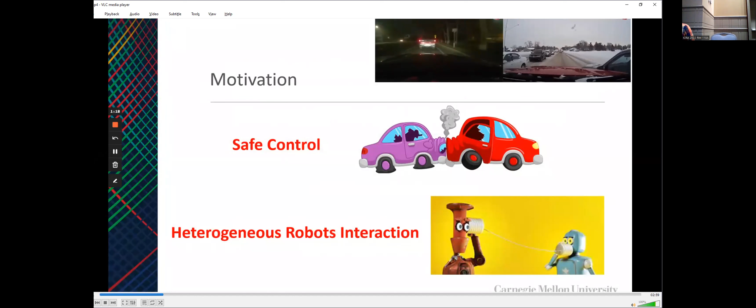These are the motivations of this work. As for technical objectives: first, we have safety as a priority for forming proof guarantees. Secondly, we want to remove the over-strict assumptions on surrounding robots to make them really think and act like a human. Thirdly, we want to enhance the safe controller's expressivity for more precise safe behavior characterization.

Here's our proposed framework for heterogeneous vehicles, especially in a highway merging scenario. It has two major components: behavior prediction and safe controller. The core idea of the safe controller is based on the forward invariance property of the control barrier function.

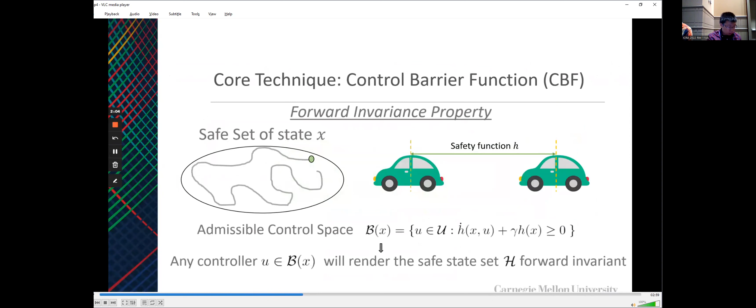CBF provides a way to constrain the robot motion so that the robot will always stay in this defined safe set. The core idea of our proposed parametric CBF is that we are introducing a new composition of the class K function as a linear combination of higher order polynomials to better characterize the system level safe behaviors while preserving safety guarantees.

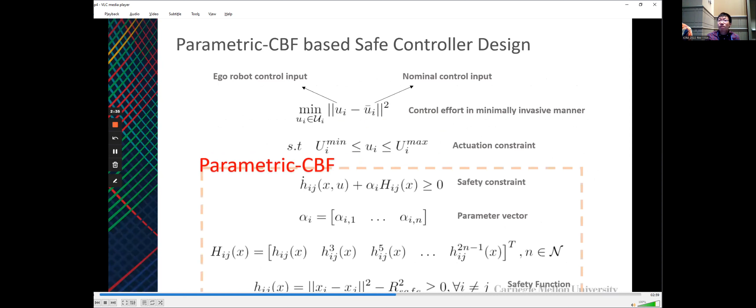The design of the safe controller starts from the minimal deviation control as the objective function. Besides the actuation constraint, here's where we have the parametric CBF to account for safety.

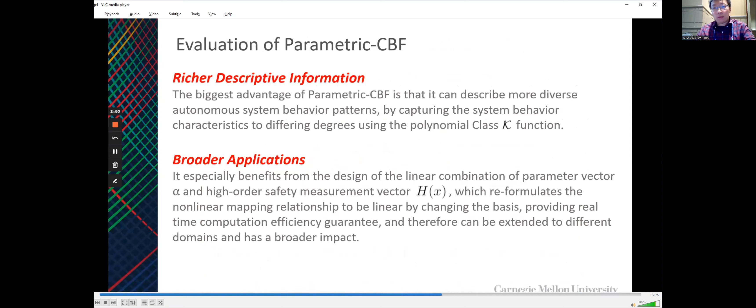Comparing to the traditional CBF, the proposed parametric CBF can actually provide richer behavior description thanks to the higher order polynomials. It also has the advantage of computational efficiency thanks to the nature of the linear combination design. These advantages make the proposed parametric CBF highly suitable to be applied in more complex systems.

And in the module of behavior prediction, ridge linear regression is used to enable the prediction of surrounding robots' safe controller parameter based on observations.

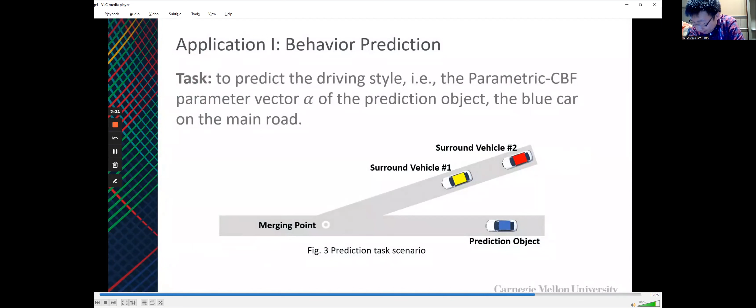Jesse, are you in the crowd? Cool. Yeah. All right. Tell me when you're ready.

Yeah, go. Hi, my name is Jesse Jiang, and today I'll be presenting my work on safe learning for uncertainty-aware legged locomotion via interval MDP abstraction. This work was done with Professors Ye Zhao and Sam Coogan.

So the motivation for our work is the legged robot motion planning problem. Specifically, we consider a scenario in which we have a high-level task for the robot specified using the syntactically co-safe fragment of linear temporal logic.

However, the robot has partially known dynamics, and additionally, there exist uncertainties in the environment such that the initial probability of satisfying the specification is too low. Then the goal of our work is to find safe paths in the state space which the robot can travel to sample and learn the uncertainties in the system, thereby improving the probability of satisfying the specification.

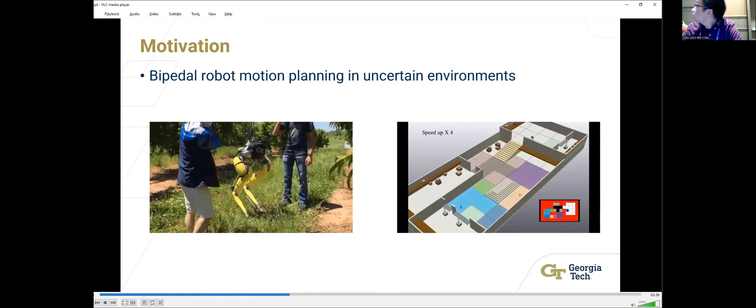So the methodology of our work is to assume a hyperrectangular partition of the state space. Using this partition, we can then construct an interval Markov decision process abstraction of the system dynamics, which formally incorporates the uncertainties present in the system and respects the inverted pendulum model dynamics of the legged robot.

We then combine this IMDP abstraction with a finite state automaton of our specification to create a product IMDP construction. Using this product IMDP construction along with graph theoretic methods, we can then calculate safe paths in the environment which don't violate the specification, allowing the robot to sample the uncertainties in the system.

We use Gaussian process regression with these samples to learn separately the terrain and model uncertainties present in our system, and then feed back our GP model into the product IMDP, shrinking the transition probability intervals and thereby iteratively improving the probability of satisfying the specification.

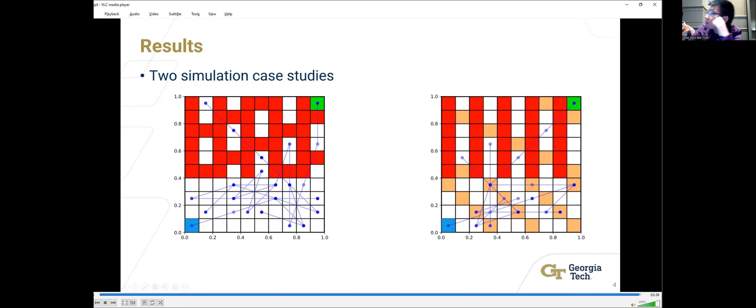I'm Matti, and today I'm going to talk about our recent work on Gaussian belief space planning under temporal logic specifications. In many real-world robotics scenarios, we don't have exact knowledge about the state of the system due to ubiquitous motion and sensing uncertainties.

Take, for example, this drone, which is localizing itself using noisy radio signals from an antenna station. As a consequence, we can only obtain a probability distribution over possible states, commonly known as the belief. In many robotic applications, people decouple estimation and planning by doing state-space planning based on the most likely state, which can lead to catastrophic failure, as shown here, where we can have a high probability of collision.

Instead, we focus on planning in belief space, which makes it possible to obtain paths that actively reason about the uncertainty of the system. As opposed to other belief space planning frameworks, we want to solve problems under various spatial temporal specifications. In our framework, it is possible to encode new desired system behavior, such as that we don't want to enter an area until our state uncertainty is sufficiently low.

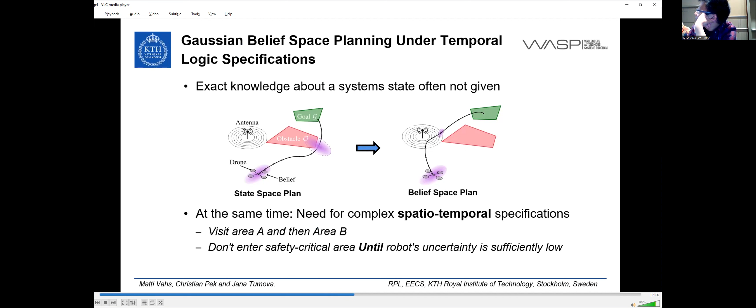We use Gaussian parameterizations of the underlying probability distributions and use the extended Kalman filter to model the belief dynamics. Then, given the belief, we define a specification in belief space using a fragment of risk signal temporal logic.

Within this module, we propose a novel formulation of the risk of being inside or outside of convex polygon regions, where we leverage risk measures such as the value at risk.

The cool thing about using risk signal temporal logic is that it comes with the so-called robustness values, so we can quantify how well we satisfy or violate a given specification. In the motion planning problem, we then maximize this robustness function subject to our belief dynamics to come up with a plan that satisfies our specification.

Here we show some preliminary results where we have a robot operating in a light dark domain. It can only accurately localize itself in the light areas, which could represent antenna stations.

We have a specification given as a risk-aware reach avoid objective. Interestingly, we can observe this active information gathering behavior since the robot is always moving close to the antenna stations.

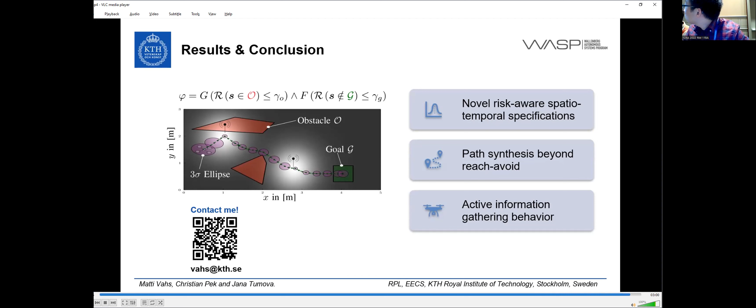In our work, we show that Gaussian belief space planning can be extended to solve complex, risk-aware spatial temporal tasks, and thus go beyond the classic reach avoid. Thanks for your attention, and I hope to answer your questions during the poster session.

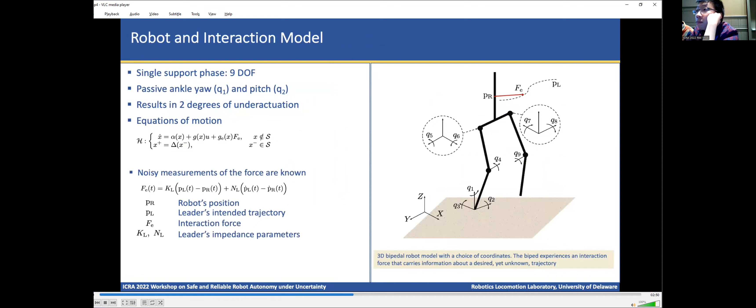Here we see on the right the 3D bipedal robot with its coordinates. We model the walking as a sequence of alternating phases of single and double support, and the external force is denoted.

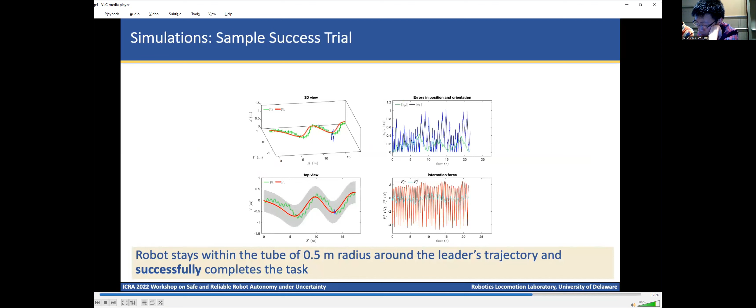In this slide, we explain the results of the robot trying to follow the leader's intention. We see that the robot is capable of staying within a tight tube of 0.5 meters around it and successfully completes the task.

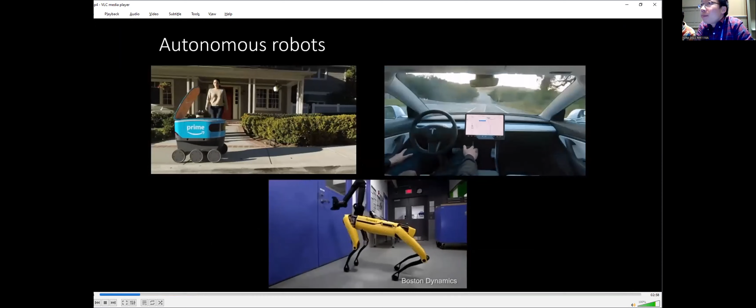Many emerging robotics applications involve autonomous robots in unknown environments. These robots include the functionality to detect hazards that are expected during the system design phase from sensing data. During deployment, unexpected events can become hazards if not detected in time. These hazards can be more costly than aborting a mission early.

We classify anomalies for robots along 4 axes. The first differentiates low-level sensory anomalies from high-level semantic ones. The second indicates if an anomaly is a hazard to the robot or not. The third discriminates visual anomalies that are geometric in nature from those that are not. The last one, not shown in the figure, indicates if an anomaly is relative to the robot or mission or not. We propose a novel dataset composed of 3 scenarios.

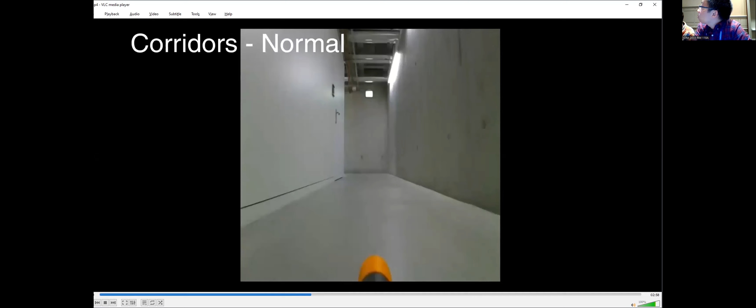The third, called corridors, is a set of recordings of a ground robot that traverses maintenance corridors of a university campus. Here we have recorded 8 different kinds of anomalies. In all scenarios, the expected normal situation is an empty environment, while any object, person, or situation that differs from that is considered anomalous.

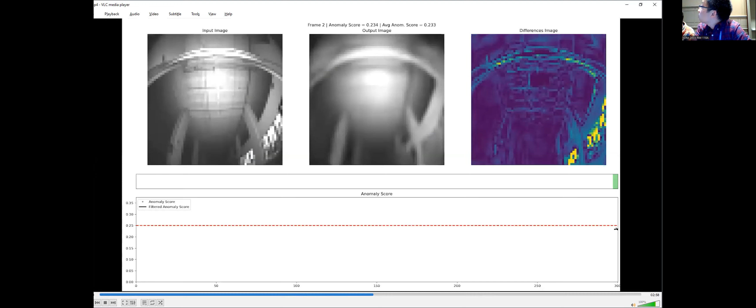We then train, using this data, a model based on an autoencoder and Real NVP, and deployed it on a real drone. We show 3 videos. In all of them, on the top left you see an image coming from the drone, in the center the autoencoder's reproduction, and on the right side an error map between the input and output of the autoencoder that highlights an anomaly.

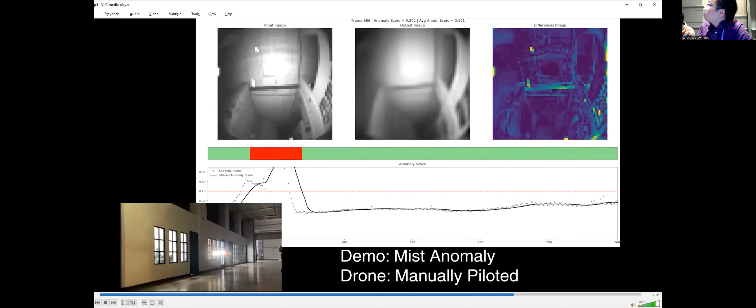In the first video, we see no anomalies, so the system doesn't trigger the anomaly detection. In the second, the drone is manually piloted and encounters a mist anomaly. Since it's manually piloted, the anomaly is detected, but then the pilot makes the drone traverse the anomaly. The plot on the bottom is the anomaly score we use to trigger the anomaly detection. In the last one, the drone is autonomous, the system is on board, and we successfully detect the tape anomaly.

In this case, we do not limit ourselves to detection; we also trigger a safety policy where the drone retracts and actually makes a second run that follows a safe path.

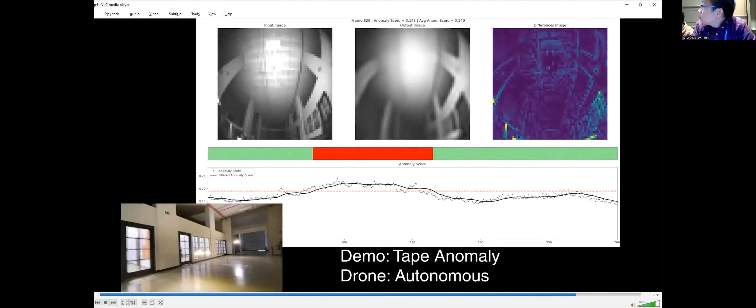We considered the task of detecting anomalies for autonomous mobile robots, categorized the relevant types of visual anomalies, proposed a novel dataset built for this task, and tested a state-of-the-art approach in real time. These are only the first steps of a larger project. Thank you for listening. Feel free to ask me any question here or at the poster session.

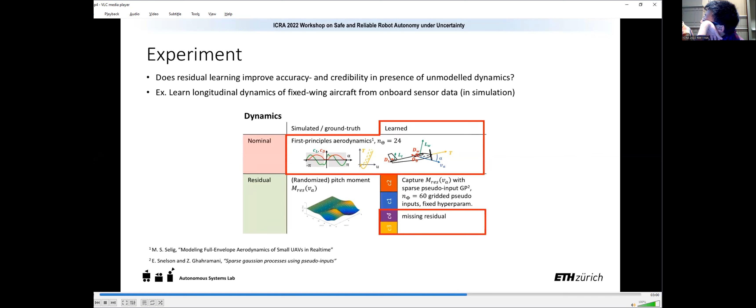We compare it to the case where we ignore the additional pitch moment and only try and learn the nominal dynamics. In terms of the result, we see that learning rate, first, is highly dependent on the information content of the trajectory, which would be expected.

So for the gliding flight, which is basically steady state, there's not much to learn and the error stays somehow high, whereas for the highly informative drop trajectory, the error is quickly reduced over full state space. Now, whether or not we learn the residual actually doesn't make a big difference for that case.

However, on the right side, if you have a look at the similarity between estimated and actual error distributions, you see that learning the residual in this case helps to improve the accuracy of the uncertainty specification.

Also, from a safety perspective, we would like to have a low credibility index, which means the predicted distribution should be a little bit wider than the true error distribution. This is the case for one, and overall we see that including residual learning gives us a lower credibility index, which is beneficial for safety.

So thanks for your attention, and happy to speak more in the poster session.

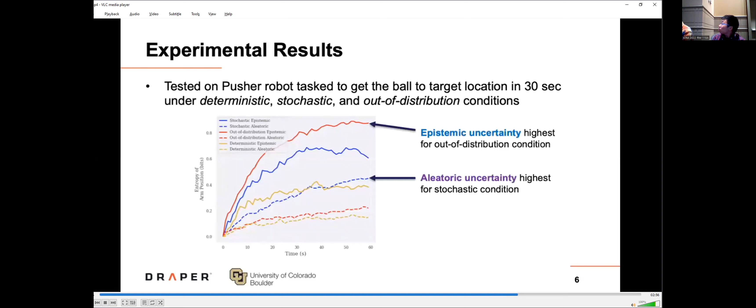Here we see that epistemic is highest for the out-of-distribution condition and aleatoric is highest for the stochastic condition, which is expected.

We can also look at total uncertainty for all time and for all states in the three conditions, and here we also present the competency values as forecasted probability of success.

This allows us to see how the different uncertainty types correspond to the competency values, and we can say in this task the agent is least confident in the stochastic condition.

So in conclusion, this shows how proper uncertainty quantification methods can lead to more informative competency reporting. For future work, we want to analyze how the different uncertainty types correspond with each other and interact with each other, and how that also impacts the agent competency. Thank you.

Not sure if anyone's coming in person for this one. So let's assume that they're not.

Hello everyone, we are glad to present our work, Effect Learning for Machine Perception with System-Level Objectives. First, let me introduce some background of our work.

A typical autonomous system consists of two components: perception and controller. Usually the perception component contains the machine learning model that senses the true environment and outputs the perceived environment to the controller. The controller then makes corresponding decisions based on this information.

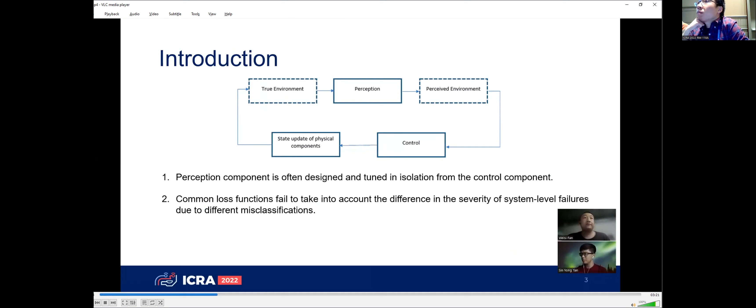However, the perception component is often designed in isolation from the control component. Also, the common loss functions fail to take into account the difference in severity of system-level failures due to different misclassifications. More specifically, for safety consideration, it is necessary to incorporate safety rules into the autonomous system.

For some specific classes, for example, pedestrians need to have higher priority than other classes. Also, current perception components still have difficulty formally specifying properties that reflect human-level perception. Last but not least, the widely used loss functions do not have the ability to represent safety rules.

To resolve these limitations, I will let my partner Sin Yong introduce our proposed framework. Thank you, Wesley. Hello everyone, I'm Sin Yong. I'll continue with the next part of the presentation, the proposed framework of our group.

To give the framework a little more context, we are experimenting with this framework in an autonomous driving setting. In the perception model, we are mainly doing object detection. For the controller, we look at vehicle information such as position and velocity, and perform actions that control the car's acceleration, steering, etc.

Now that we know the entire setup, I will dive a little deeper into the loss and rulebook components. In the loss function, we mainly have two parts. First, we have the classical perception loss, which is commonly the combination of a bounding box loss and a classification loss. Secondly, we have the rulebook loss as well.

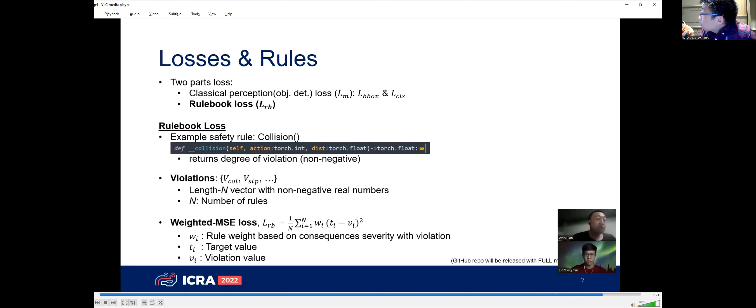Now we have a bunch of these rules in the rulebook, so what we get in the end is a vector of non-negative rule violation numbers. Using this violation vector, the rulebook loss can be computed as a weighted mean square error loss as expressed in the slide. The weight in this equation is a rule weight that we assign based on the severity of the consequences if the rule is violated.

With that, I would like to thank you for your attention, and feel free to reach out to us if you have any questions. Thank you.

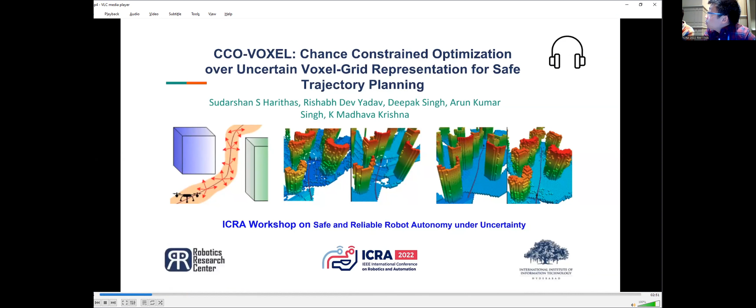In an uncertain voxel grid representation, it is difficult to extract accurate distance-to-closest-obstacle measurements, and furthermore, the gradients obtained are not stable. This might lead the trajectory optimizer to generate trajectories that go very close to an obstacle or even collide with it. Therefore, there is a requirement to develop motion planning frameworks that are agnostic to the underlying uncertainty in the voxel grid representation.

As a solution to the defined problem, we propose CCO Voxel, a method that accounts for the uncertainty in the distance-to-collision measurements and determines an optimal solution through a gradient-free cross-entropy minimization technique.

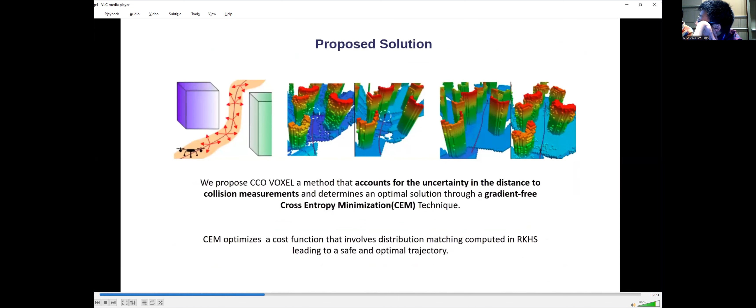An overview of our pipeline is as follows.

The planning algorithm is initialized by the availability of a goal point. Pose and point cloud data is used to generate an octomap, and EDT is used to compute the collision distance for all the points in the map.

Our initial trajectory search builds on kinodynamic A-star, with the crucial difference that we use MMD as part of the edge cost that connects the two nodes of the graph. Output of the kinodynamic A-star can be a suboptimal trajectory. We use cross-entropy minimization, a gradient-free optimization method, to further refine the trajectory, improve its smoothness, and maintain clearance from an obstacle.

The MMD computation involves two steps. First, for a given query point, the collision distance is determined using EDT, and a non-parametric collision distance noise model is used to obtain multiple samples of the distance measurements and the corresponding constraint violations.

An autoencoder is used to improve sample complexity and reduce computational load. For a given high-dimensional sample data, the autoencoder projects it into a low-dimensional embedding space, and the autoencoder is trained using supervised learning. In this paper, we further prove that the desired distribution can be modeled as a Dirac function to compute the MMD. The output of the cross-entropy minimization is an optimal trajectory.

Simulations have been conducted for both qualitative and quantitative evaluation of our algorithm. We create two customized Gazebo environments, namely the box-cylinder world and the wall-grid world.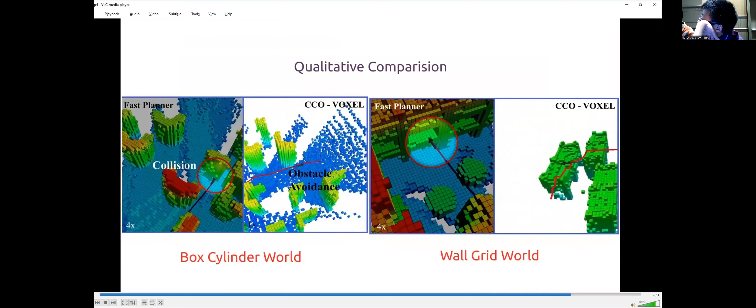We conduct a fully autonomous test flight in an outdoor unknown environment. We use a customized self-developed quadrotor with a D415 camera, a Pixhawk flight controller with PX4 firmware. All the computations, including mapping, state estimation, and planning, are conducted on an onboard Intel NUC.

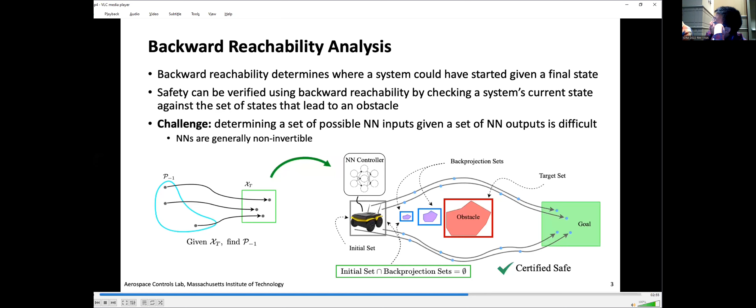Our work circumvents the problem of propagating sets backward through a neural network by first finding the set of possible states that the system could have come from given limits on the control values. We call this set of states the back reachable set.

Next, we relax the neural network over the back reachable set to get affine upper and lower bounds on the control values. These affine bounds give us a better picture of what the neural network is doing when compared with the saturation limits of the system.

Finally, we use these affine bounds to determine the set of states that reach the target set while also satisfying these bounds, which gives us an idea of what the system could have actually come from, i.e. the back projection sets. We use this technique to show that we can certify safety for systems where forward reachability fails, like the situation you can see here.

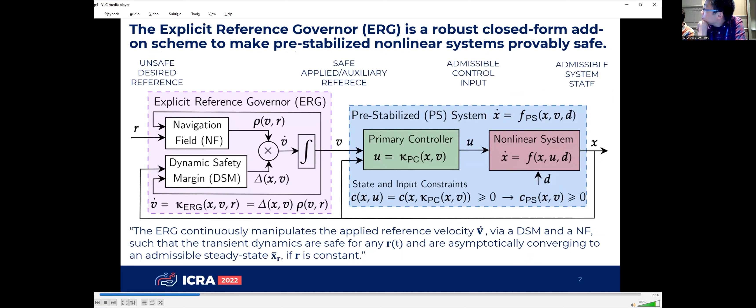The ERG is a robust closed form add-on scheme to make pre-stabilized nonlinear systems provably safe. It does this by manipulating the reference velocity, V dot, via a dynamic safety margin and a navigation field, so that the transient dynamics are safe for any reference R of t. And when this reference is kept constant, there will be convergence to some steady state admissible state.

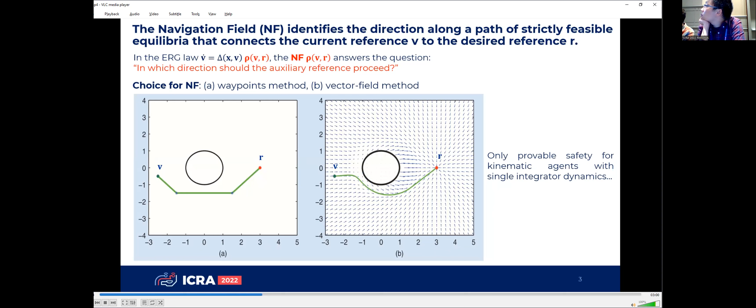The first building block is the navigation field, which identifies the direction. It's a vector along a path of strictly feasible equilibria, bringing the current reference V to the desired reference R. One can use waypoint or vector field methods, but know that these only provide safety guarantees for slowly moving kinematic agents, so single integrator dynamics.

That's why we have a second building block, the dynamic safety margin, which predicts a minimal distance metric from a trajectory or a set to constraint violation. The larger this dynamic safety margin, the safer it is to change the auxiliary reference. There exist different types of dynamic safety margins: some are more performant, like the trajectory-based one; some are more easy to robustify, like the Lyapunov-based one or the set-based ones; and some are used for black box systems, like reachability-based.

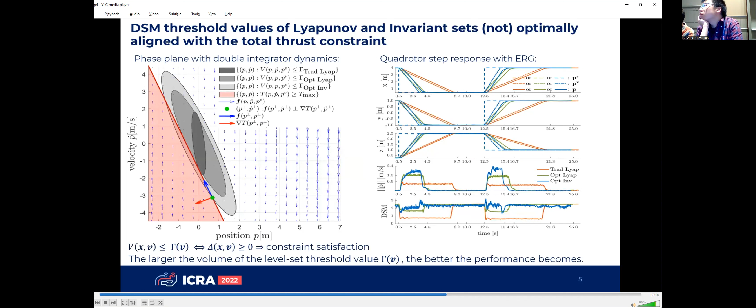Here is an example of a double integrator system, and we see the phase plane plot with three invariant sets that touch the constraint, in this case a total thrust constraint. By solving some small nonlinear problems offline, we can align these level sets with the constraint to increase performance, or even compute a more generic, larger invariant set by finding that green point where the system dynamics stop pointing inward. So the larger the set, the better the performance, as can be seen in the step response, where it is almost twice as fast if we align it.

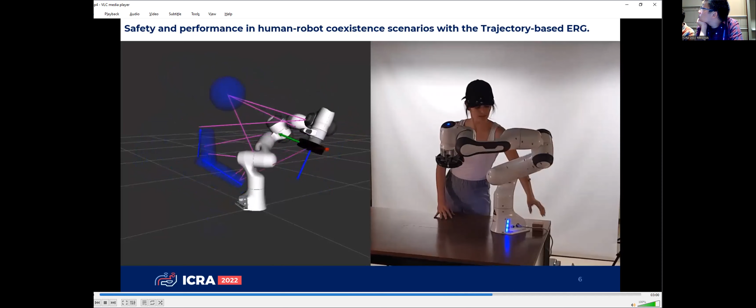Here is an example in a human-robot coexistence scenario where the human operator is trying to coexist safely with the robot, but while keeping the performance high, which is definitely not the case in most of the prior works. We show that the human can reposition an object safely, while the robot is accounting for both torque and end-effector speed and velocity constraints, and also joint angle limits. This allows safe and performant operation in robot tasks.

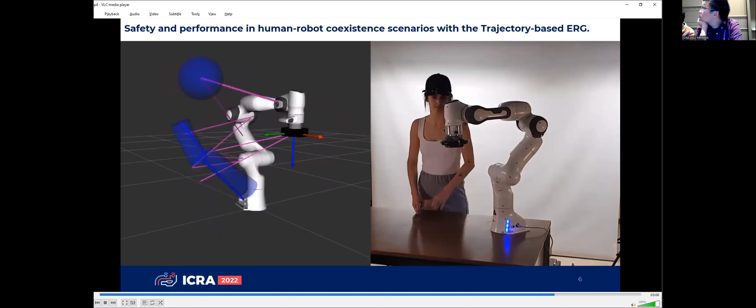Hello everyone, my name is Anil. Today I'm going to talk about our work on input to state safety with disturbance observer based control barrier functions.

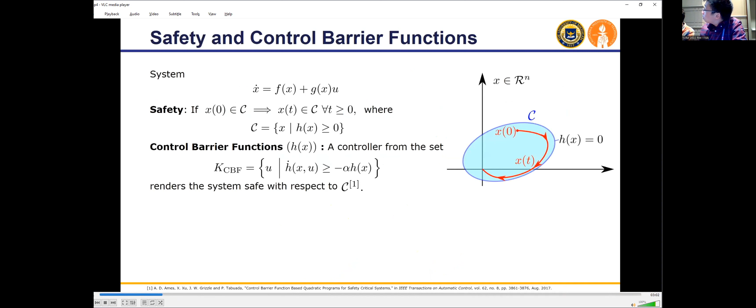In this work, we consider safety in the context of forward invariance, where we want our system trajectories to remain in a predefined set. We know that control barrier functions give us a set of controllers that actually ensure this task.

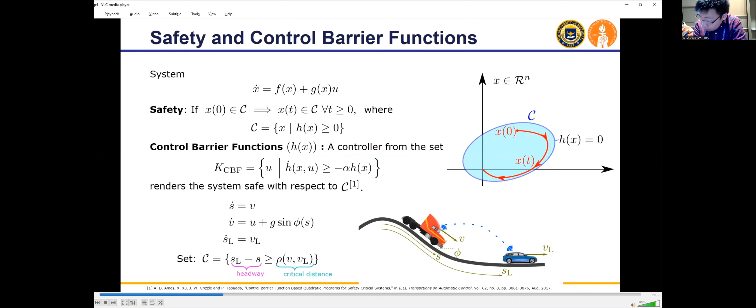We implemented this method for an autonomous vehicle problem, using a simple double integrator model to control a truck, where we want to stay a critical distance away from the leader. We implemented this approach for the truck in a flat road case, and we were able to ensure the safety.

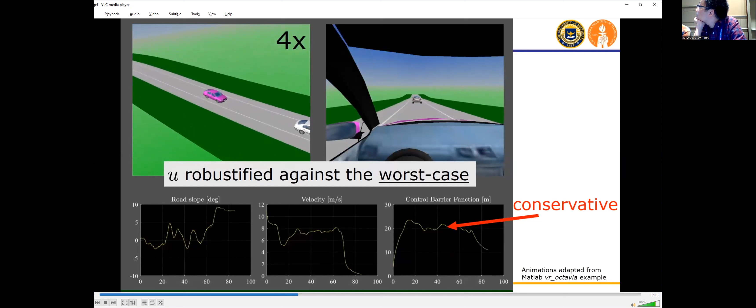However, the problem is if we have external disturbances such as road slope, we realize that's no longer the case, unfortunately. If we take the worst case of the road disturbance, then it's going to be a very, very conservative result.

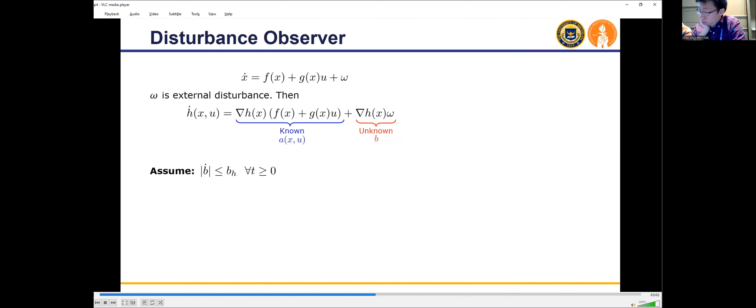So in that case, we just want to observe the effect of the uncertainty on the CBF online, and cancel that. This is our method. We have an assumption that this observer's uncertainty is upper bounded, and the time derivative of this uncertainty is also upper bounded.

We are making use of the term B being scalar, and we are coming up with this high gain disturbance observer. We observe that term B, and we cancel it out.

We have two types of errors coming from the observer dynamics, and we use input-to-state safety to handle the permanent error that remains as time goes to infinity.

In input-to-state safety, we come up with a larger set to be the safe set, bounding the safety degradation in the system in the context of external disturbance. This is good because we can make sure this larger set can be arbitrarily made closer to the original set by choosing appropriate parameters.

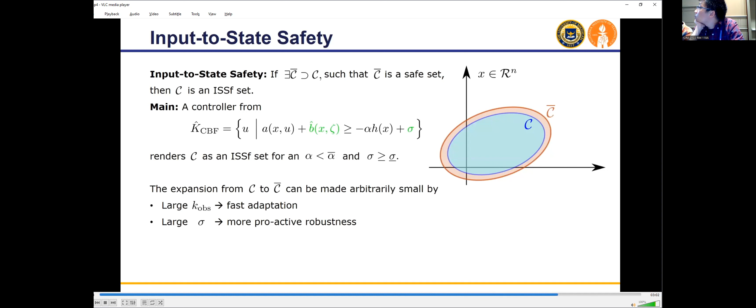When we implemented this method in simulation, we saw that we can get safety without following the leader conservatively.

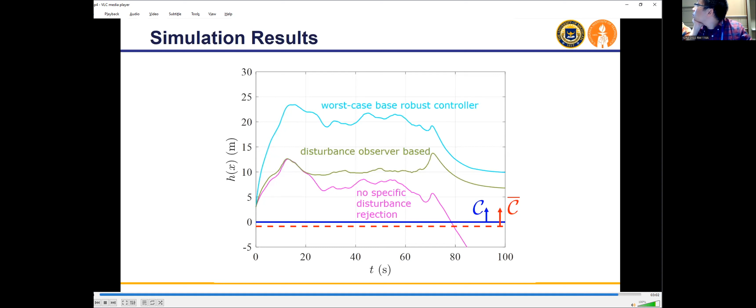The simulation results show that our ensured safety with the C bar is actually very close to the original safety task.

Thank you for listening. I'll be happy to answer your questions at the poster.

Ready? Cool. Hi everyone, my name is Wang Yu from Lehigh University. This is a work of collaboration with Dr. Somarakis and Professor Motee. Today I'm going to present our work on the risk of cascading collisions in a platoon of autonomous cars.

Let us imagine on the highway there is a platoon of cars, and our goal is to form a platoon. Imagine yourself driving on the highway, and you can see the car in front and the car behind. This is actually the communication path graph.

As a result, by solving these dynamic systems, we find that the intervehicle distance is actually a random variable, and we consider failure as a collision, whenever it's less than zero. Given the fact that it's a random variable, the chance of this kind of event eventually happening is going to be 1, which is almost surely.

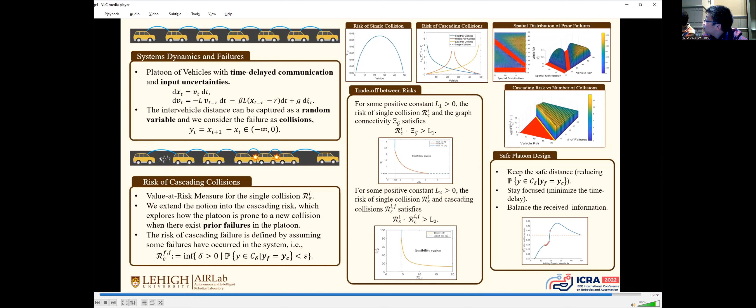In the end, try to balance the information you receive from the nearest cars and the car that's far away. Thank you so much for your attention, and I'm happy to see you at the further sessions. Thank you.

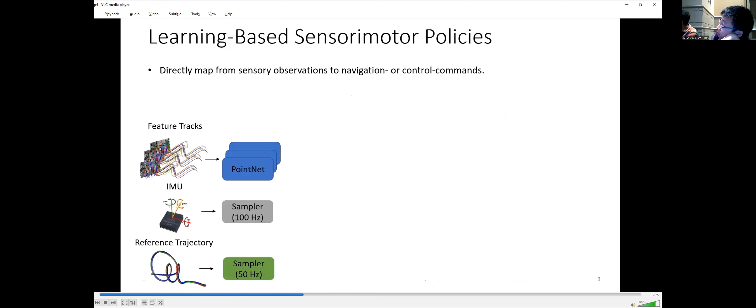In my research, I investigate learning-based sensorimotor policies. In contrast to traditional approaches to vision-based autonomous flight, learning-based sensorimotor policies directly map from onboard observations such as visual observations, feature tracks, IMU measurements, or a reference trajectory to control commands. Such direct mapping and therefore tight coupling allows us to achieve low latency from perception to action.

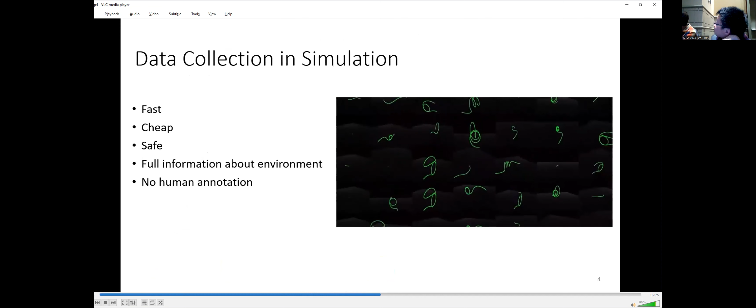As such, data-driven approaches require a lot of data to be trained, and they are typically trained in simulation. Simulation is a perfect training ground for such a task because it's fast, cheap, and safe, and it provides full information about the environment and doesn't require any human annotation. However, training such a learning-based policy in simulation requires bridging the simulation to reality.

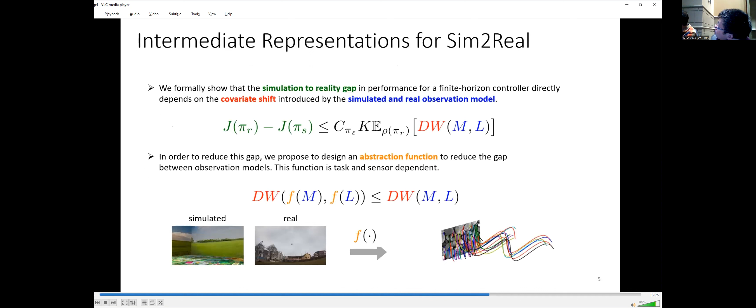In my research, I showed that suitable intermediate representations benefit the simulation-to-reality transfer. Specifically, I showed that abstraction of sensory observations reduces the reality gap between simulation and the real world. I also showed that we can use abstraction of the control modality of the policy to benefit this transfer.

I demonstrate this idea on the task of vision-based acrobatic flight, where we show the first quadrotor that can perform such acrobatic maneuvers completely vision-based and with only onboard computation, as well as on the task of high-speed flight in the wild, where we demonstrate that such a learning-based sensorimotor policy can achieve high-speed flight at up to 10 meters per second in previously unseen cluttered environments, ranging from dense forests to snowy mountain trails and disaster scenarios.

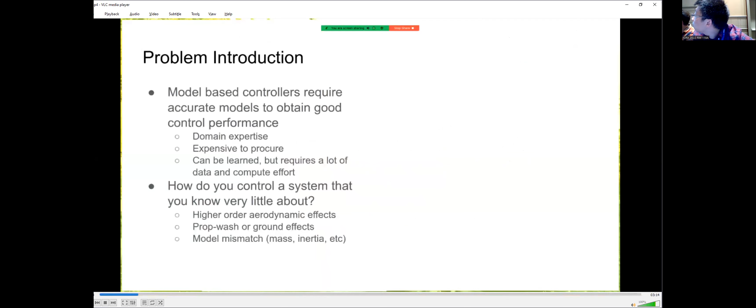For any sort of model-based controller, typically we require an accurate model of the dynamic system to achieve satisfactory control performance. When the system is complex and nonlinear, as is the case for high-speed quadrotors, these models become increasingly difficult to procure, often requiring high amounts of domain expertise or data. Once you've learned the model, it won't generalize to changes to the platform, for example unknown payloads, rotor failure, changing aerodynamics, etc.

Our approach was first to leverage our knowledge of the known properties of the quadrotor system by building a first principles-based model, and then using this model inside a nonlinear MPC.

Next, we used the solution of the MPC to derive the desired dynamics to track a reference trajectory and feed these dynamics into an L1 adaptive controller, which uses our nonlinear quadrotor model as the reference dynamics of the system. Over time, we drive the plant towards the desired dynamics from the MPC, using the differences between our model prediction and the measured states of the quadrotor.

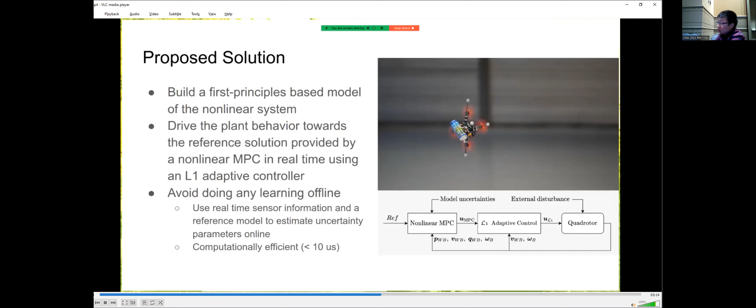With this setup, we avoid needing to acquire a data-driven model to learn unmodeled dynamics from the first principles approach. It also enables us to be resilient to model mismatch, such as mass, inertia, and aerodynamics. We demonstrate the efficacy of this approach on a series of real-world experiments using a racing quadrotor.

All of the controls are computed onboard the quadrotor in real time, and across each of these scenarios, neither the underlying model nor the controller gains are modified.

Next, in scenario 2, unknown to the MPC or the L1 controller ahead of time, we attach a 450 gram payload representing a 60% increase in mass. Adaptation occurs immediately, resulting in less than 1 centimeter RMSE.

Similarly, we can introduce an aerodynamic disturbance in the form of a fan that the adaptive controller has to immediately compensate for.

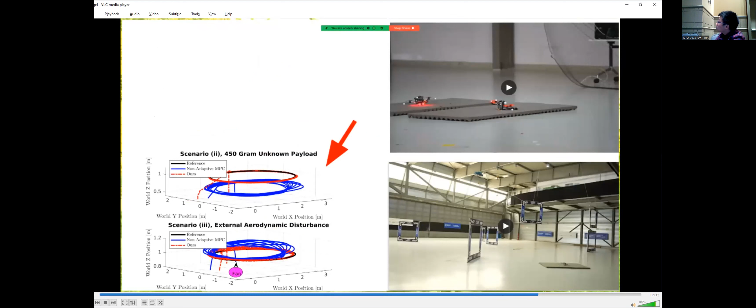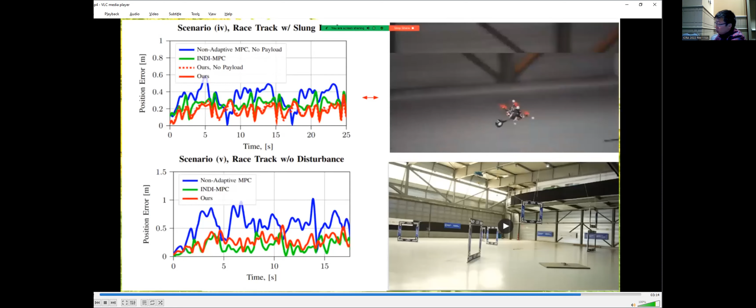Next, in scenarios 4 and 5, we can attach unknown payloads that are slung. This is a 100 gram payload that's unknown to the MPC, and we can demonstrate even better tracking performance compared to a non-adaptive MPC without a payload attached.

And again, with the same controller, we can fly a highly aggressive racing trajectory with top speeds of over 20 meters per second and 4 G's linear acceleration.

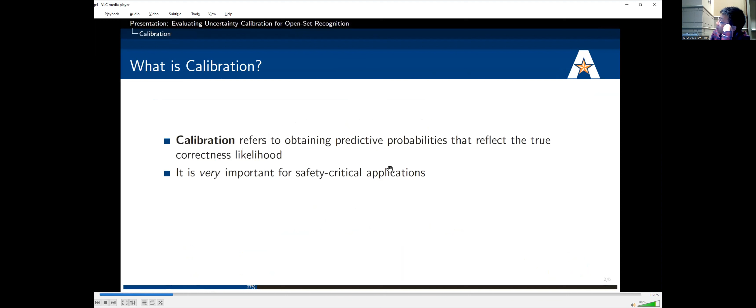So what is calibration? Calibration of deep neural networks refers to obtaining predictive probabilities that reflect the true correctness likelihood. It's extremely important for safety critical applications such as robotics and self-driving cars, where having reliable predictions is key.

Traditional evaluations are simply either for closed set data, or they have no explicit rejection option for data coming from unknown classes that you did not train on. So what is open set recognition? It identifies instances that are not from any of the training classes while trying to maintain discriminative capability of the closed set classification.

We do this by adding an additional 'none of the above' class for rejecting those unknown samples that we come across.

Motivated by this novel problem, we evaluate using these classifiers - ResNet, DenseNet, and EfficientNet - on two different data sets, SVHN and CIFAR-10. We randomly split the data into known and unknown classes, and then do the following.

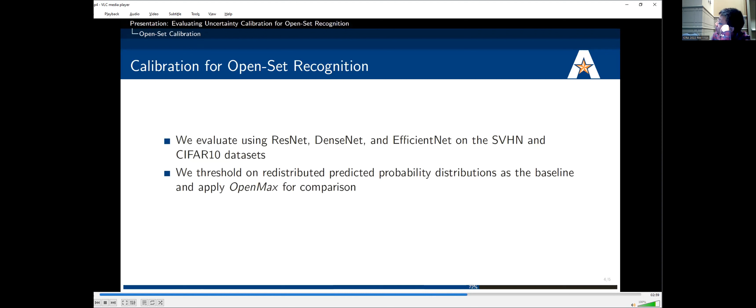First, we obtain a threshold on the model that we learned based on a redistributed predicted probability distribution. This serves as our baseline. We also apply a well-known technique for open set classification called OpenMax for comparison, and then we use a popular technique called temperature scaling for doing the calibration.

Here we can see the results of ResNet on the CIFAR-10 data set. On the left, we see the reliability diagrams, which allow us to visualize the calibration performance. On the right, we see a table showing the Brier scores and the expected calibration error.

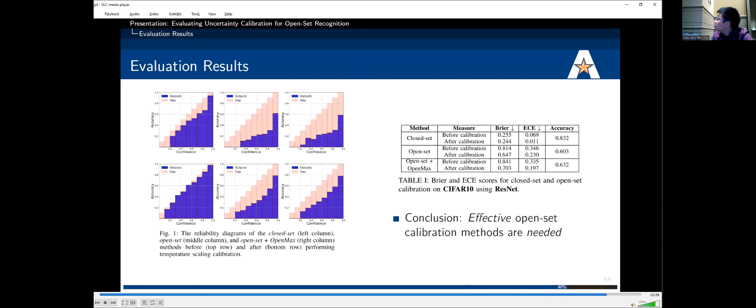The key takeaway here is that temperature scaling is only effective to a small extent on open set recognition. Thus we argue there's a need for developing new techniques that can provide open set recognition for safe and reliable autonomous systems. For more information, please visit our poster. Thank you.

Hello everyone, I'm Kunal Narkhede. Today I'll be presenting our work on reactive motion planning based on sequential model predictive control for bipedal robots.

Our approach is based on RRT guided decomposition of the free space into sequentially intersecting polygons, which are then incorporated into the model predictive control framework as control barrier function constraints.

The footstep pattern generated by the sequential MPC is tracked on the robot using operational space control formulated as a quadratic program. First, the available free space is partitioned into obstacle-free polytopes and the corresponding intermediate waypoints.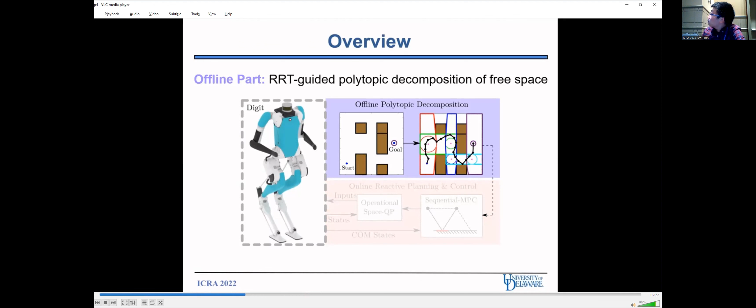Our algorithm ensures that the resulting polytopes are sequentially pairwise intersecting and the waypoints are located within the intersection of the polytopes. The polytopes and waypoints are used to define a sequence of MPC programs that drives the system to the goal location while ensuring the evolution is kept within the obstacle-free polytopes.

The sequential MPC employs the linear inverted pendulum model to generate the footstep plan. The cost of each MPC is designed so that it transfers the system from the current polytope to the next, to the intersectional area. As soon as the system enters the intersection area, the algorithm switches to the next MPC in sequence.

Finally, the footstep plan generated by the MPC is tracked on the robot using operational space control formulated as a quadratic program.

We implemented the proposed sequential MPC and QP-based operational space control to plan and execute obstacle-free motions in high-fidelity simulations on the bipedal robot Digit. We used MuJoCo as our simulation environment.

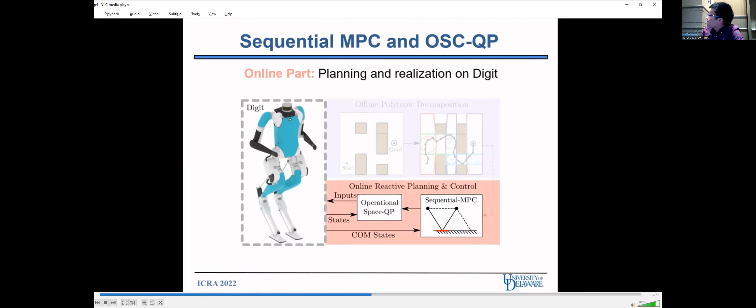Finally, we tested the robustness of our method to unknown external forces applied to Digit's torso. The applied forces are drawn at random from a uniform distribution with a maximum magnitude reaching up to 80 newtons.

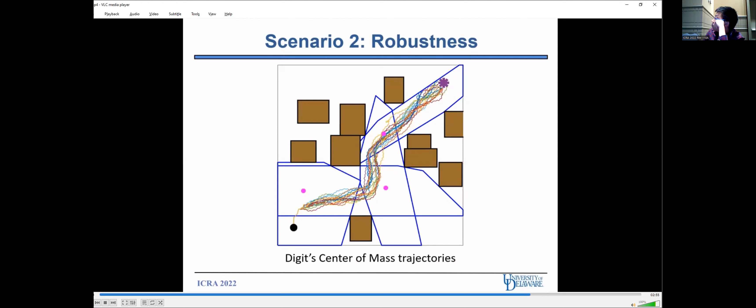Owing to the ability to solve the sequence of MPCs at sufficiently high frequencies, the robot was able to maintain balance and complete the objective of reaching the goal without collisions, keeping the center of mass within the union of polytopes. The presented results demonstrate that our method is capable of performing online reactive planning on a complex bipedal robot like Digit in uncertain and dynamic environments.

Thank you. I'll be happy to answer questions during the poster sessions.

Almost there. Okay. All right. Ready? Let's do it.

Hi, I'm Catherine Shea, and I'll be presenting on safety and indoor navigation for guide robots.

We can use robotic guides to provide physical navigation assistance, particularly for people who are blind or low vision. These guides, available in public spaces such as transit stations, could improve accessibility by allowing easier travel through these complex dynamic scenes. But when escorting their users, they must be able to navigate to their goals both safely and efficiently.

To study the features and utility of robotic guides, we use a small mobile robot with a handle for the user to hold onto. We assume the user doesn't have any special equipment to interact with the robot. The robot has a forward-facing LiDAR with a limited field of view.

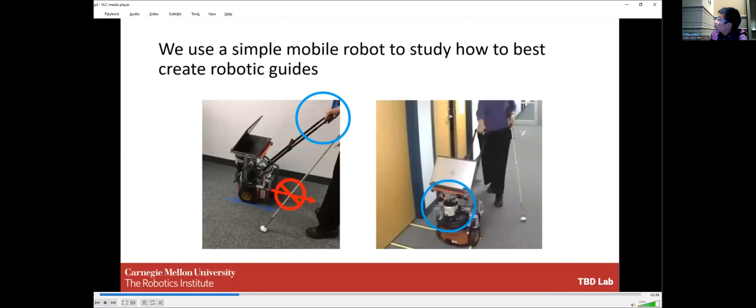To avoid any discomfort or injury to the user, it does not back up, so it can only move forward or turn. Although the user's position behind the robot is constrained by their grasp on the handle, this still allows for a wide range of relative poses. So simply planning robot paths as if the user might be in any part of that possible space is excessively conservative.

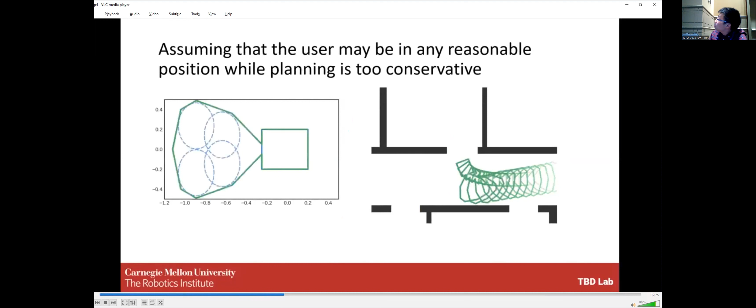To provide reactive safe controls that interface readily with higher level planners, we're exploring a control barrier function based method that governs rotational motion. Our model of user position, proposed by Nanavati et al., updates the user's pose based on an average of the position directly behind the robot and the closest position in a region of occupancy defined by an annular segment.

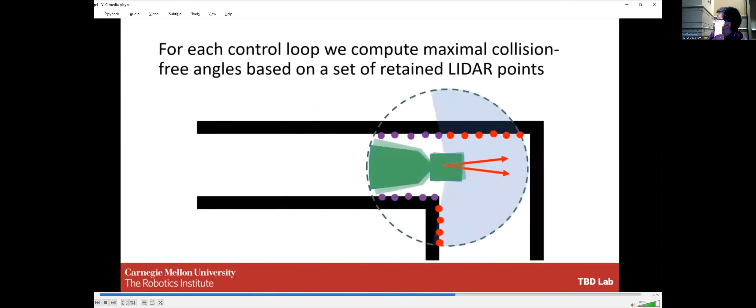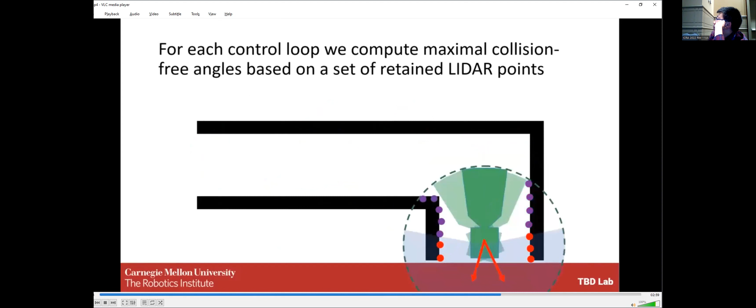We fit a symmetric one-dimensional quadratic function to this point and use that as our safety index. And as in other CBF-based methods, we solve for the nearest-to-nominal robot control that keeps the safety index greater than 0. We conducted some preliminary simulations using this method on a robot and user traveling through a building.

We tested the system under both nominal and CBF-enabled control for several representative paths and found that the CBF-enabled system had some minor improvements in safety, but took approximately 10 seconds longer per path to complete. The safe control tended to intervene mostly near doorways, where it was constraining the robot to move in straighter paths.

We plan to continue exploring methods of improving safety in robotic guide systems, particularly those that address under-actuation, imperfect sensing, and the problem of predicting the user's actions. We also plan to explore definitions of user safety that are not simply obstacle avoidance, such as comfort, path legibility, and memorability.

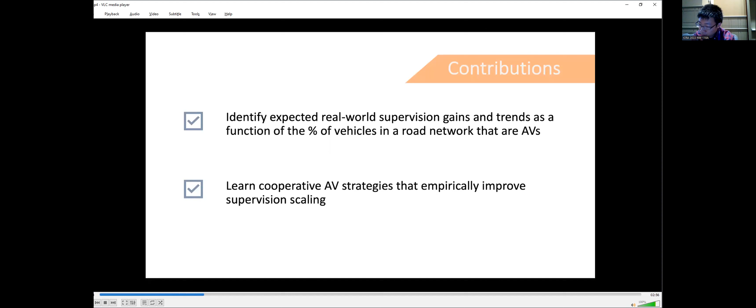The first is that we extend theoretical results to real-world supervision scenarios that are modeled with realistic traffic parameters, so that we can identify trends and gains as a function of AV penetration rate. Then we learn cooperative AV strategies via RL to show empirical supervision gains.

Obviously, we're all familiar with the benefits of autonomous vehicles, but also their dangers and their problems. But the work here is notable in that it's applicable, or focused on AVs, but it's applicable to a wide range of autonomous and semi-autonomous settings beyond AVs.

So we're focused on a highway merge scenario, and we can see the simulated traffic network here. Basically, we have 4 merging roadways into a ring road, which is known to approximate an infinite highway.

We use that to plot some theoretical results in terms of what we expect supervision requirements to be in real world settings, using realistic traffic and inflow rates. We're interested in a human baseline, a non-cooperative connected AV case, and a cooperative connected AV case.

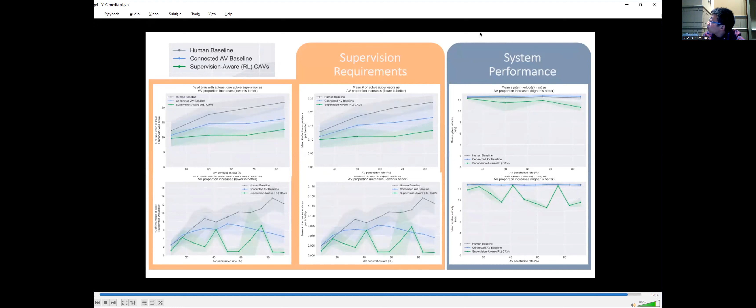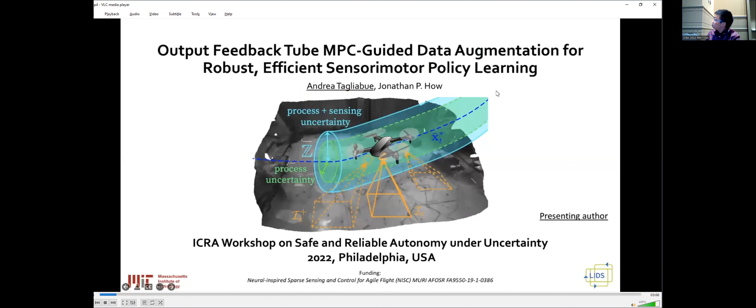Hello everyone, my name is Andrea Tagliabue and today I'm presenting work done in collaboration with Professor Jonathan How. The objective of our work is to reduce the computational cost of computationally expensive model-based sensing and control algorithms such as MPC and visual odometry.

We do so by training a neural network visuomotor policy with small inference time. This policy should be capable of controlling a mobile robot by directly using images and noisy sensor measurements. One of the leading approaches to train such a neural network visuomotor policy is to use imitation learning.

However, imitation learning techniques are usually affected by process and sensing uncertainties, as they can cause shifts between the training and testing distribution, resulting in policies with limited robustness. Additionally, these methods require a large number of demonstrations and long training time, requiring expensive training equipment and making it impractical to collect data on the real robot.

But is it possible to generate a robust visuomotor policy in a data and computationally efficient way? We answer positively to this question by using an approach that derives from collecting demonstrations from an output feedback tube MPC, which is a controller robust to the effects of process and sensing uncertainties.

The key idea of this method is to use a tube centered around a nominal trajectory to describe the set of possible state perturbations due to sensing and process uncertainty. The effects of these uncertainties are captured in the width, or cross-section, of the tube. Additionally, tube MPC employs an auxiliary feedback controller called the ancillary controller, which can compensate for the effects of these uncertainties — you can see it at the bottom of that figure.

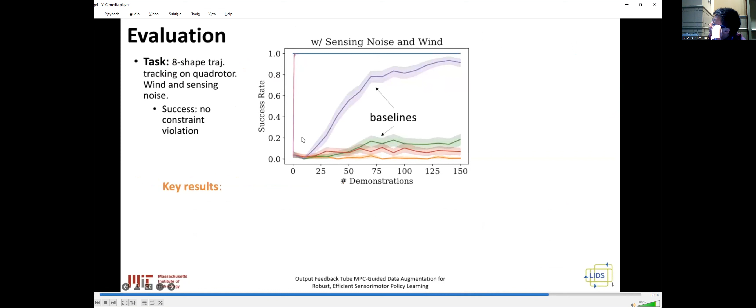We numerically evaluate our method on the task of trajectory tracking for a quadrotor. The results show that our training approach produces a policy that is highly robust to the effects of process and sensing uncertainty, such as wind and noise, while requiring about 2 orders of magnitude fewer demonstrations than leading imitation learning methods. Our strategy additionally takes about half the training time to achieve higher robustness to the effects of uncertainties.

In the future, we would like to perform hardware experiments and make the policy more robust with respect to small visual changes in the environment. To know more, please come visit our poster. Thank you.